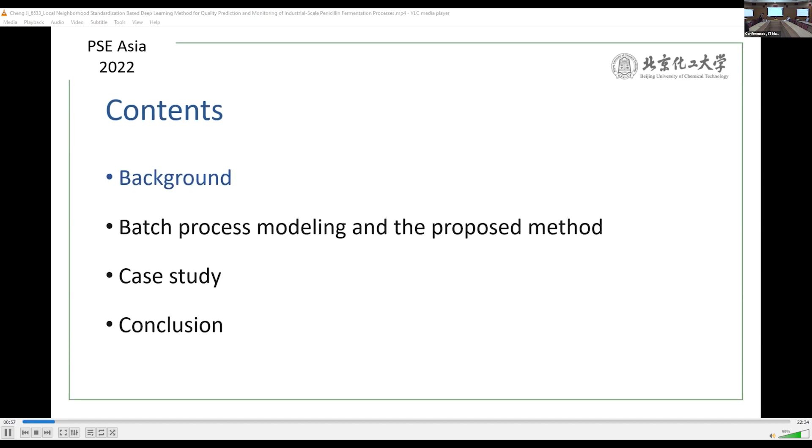The Internet is also known as the International network. It refers to the huge network that is connected between networks. These networks are connected by a set of common protocols to form a single logical huge international network.

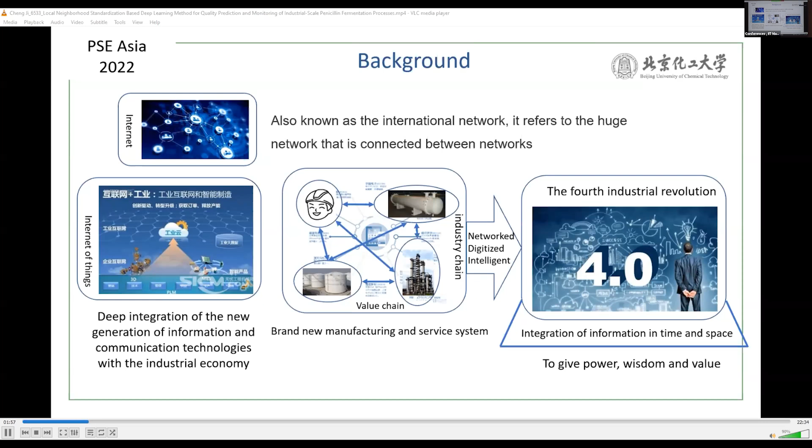The new generation of information and communication technology is deeply integrated with the industrial economy, and a brand new manufacturing and service system is formed, characterized as network, digital, and intelligent. The fourth industrial revolution is an integration of information in time and space to give power, wisdom, and value to smart manufacturing.

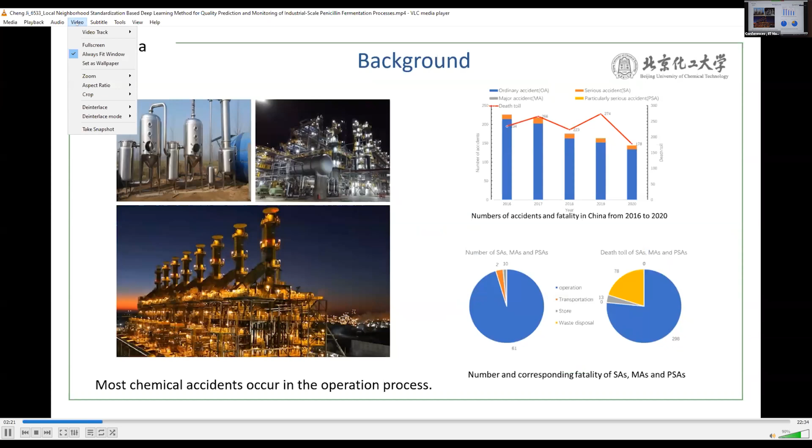According to the statistical data shown in the figure, most chemical accidents occur in the operation process. With the increasing scale and complexity of the chemical industry, real-time monitoring of the operating status of the production process is becoming more and more important, because these faults will not only affect product quality but also pose threats to human life.

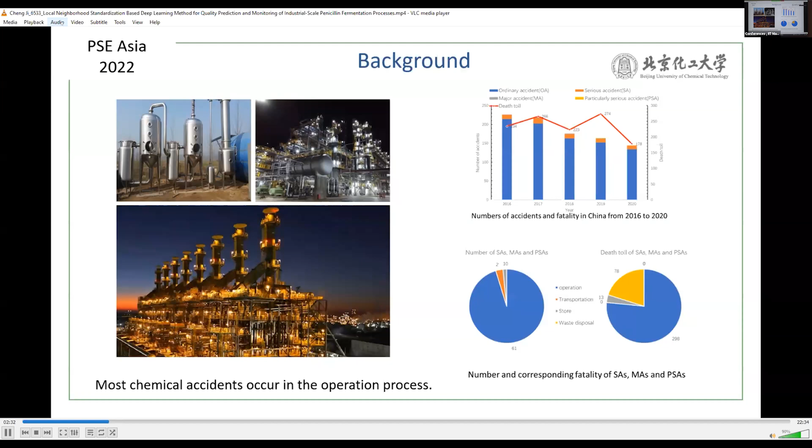In actual production, process monitoring achieved by the operator's observation of a small number of key variables based on a large threshold is still the mainstream way. This does not consider the correlation among process variables, nor can the large amount of historical data be utilized, so it is difficult to obtain promising process monitoring performance.

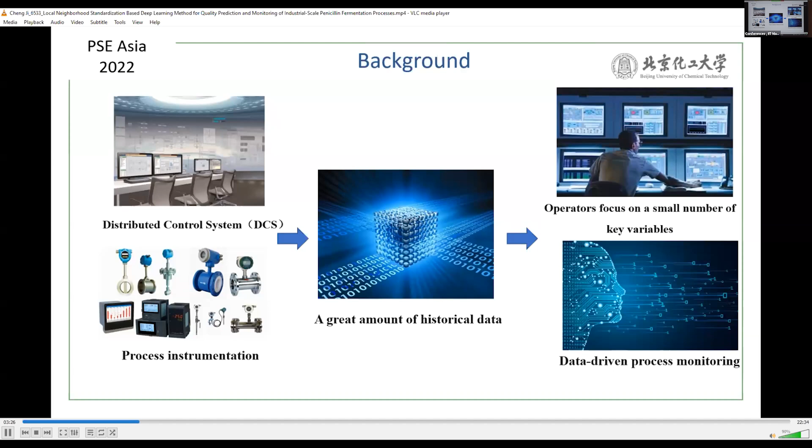To address this issue, data-driven process monitoring methods have been rapidly developed. The procedure of data-driven process monitoring consists of the following four steps: the way of data collection and data pre-processing is rarely fixed, and the monitoring statistic is a measurement of the change or distance in the feature space obtained by feature extraction. So feature extraction is the key step that defines the process monitoring performance.

At the core of developing a process monitoring method, the development of feature extraction methods has been the most intensive and important research topic in the past.

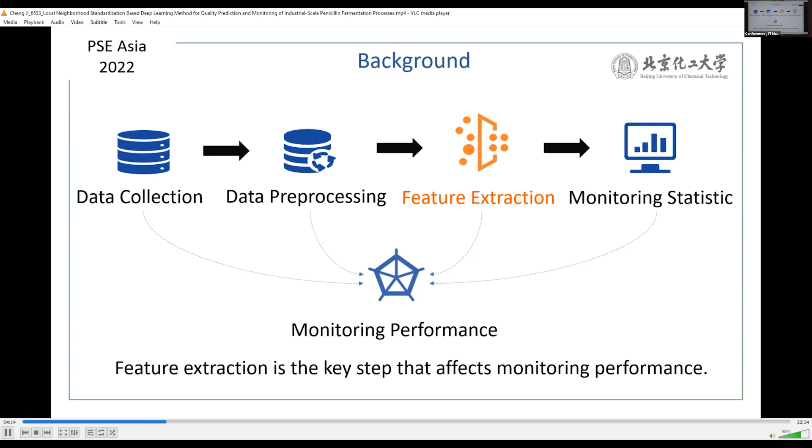Principal component analysis and partial least squares can be regarded as the earliest applications of multivariate process monitoring. The past 30 years witnessed the rapid development of data-driven process monitoring, among which two benchmark processes, one the Tennessee Eastman process and the other PENSIM, have been developed for continuous process monitoring and batch process monitoring.

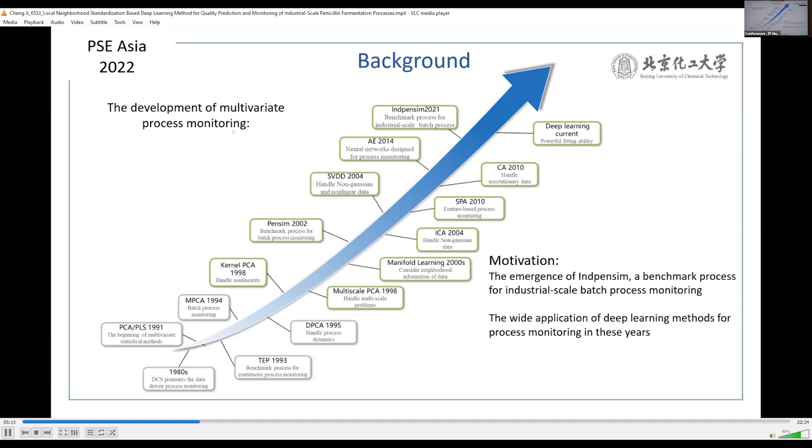This work is motivated by the emergence of IndPenSim, a benchmark process for industrial scale batch process monitoring, and the wide application of deep learning-based process monitoring methods. The original PENSIM concept is easy but with a small scale, so the difference between data with different initial conditions is not significant.

IndPenSim is developed to deal with this issue by extending it to an industrial scale, and a big dataset with 100 batches is provided here.

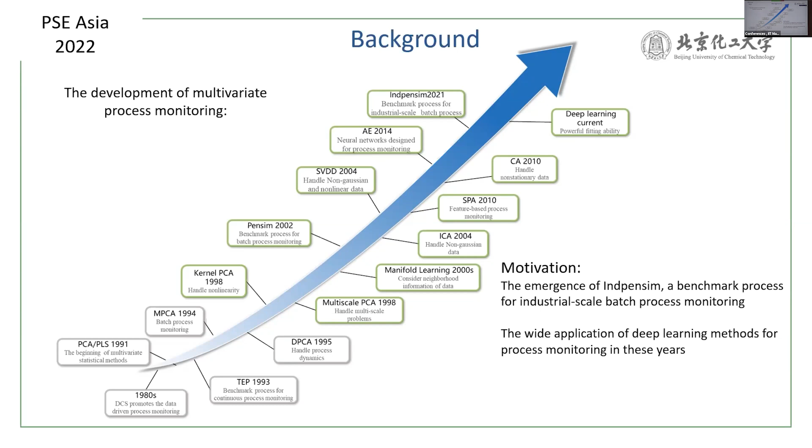This work aims to address three problems in batch process modeling. The first is to avoid difficulties caused by data unfolding preprocessing in traditional methods. This is benefited from the special batch operation of deep learning models, which will be introduced later.

The next is to monitor industrial scale batch processes with different initial conditions. In industrial batch production, the duration and length of a batch can be significantly different among batches, but the internal reaction mechanism should be consistent. Therefore, this could be achieved by extracting the common features of different historical batches.

The last one is the extraction of within-batch non-stationary features of multi-phase batch processes. Traditional recurrent neural networks tend to memorize long-term stationary information, while batch processes are multi-phase processes with short-term non-stationary information. This work proposes a differential recurrent neural network to handle this problem.

Next, I will introduce the proposed method for batch process modeling.

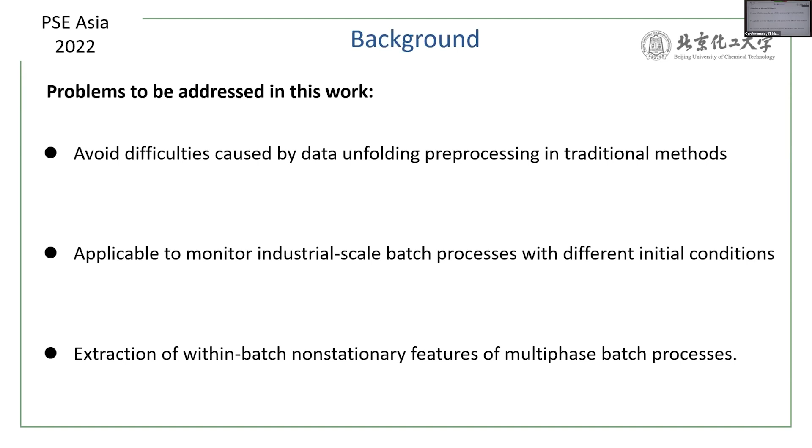As we all know, data unfolding is the most common data preprocessing procedure in batch process modeling because data collected is three-dimensional with an additional dimension of batch. As shown in the figure on the right-hand side, batch-wise and variable-wise are two kinds of ways of data unfolding. However, no matter which kind of way of data unfolding is applied, difficulties will be brought to affect the further feature extraction.

For batch-wise data unfolding, all batches are required to be processed to equal length, which means data supplement must be performed. It will change the internal data information. Moreover, in this way of data unfolding, data of a whole batch should be given to return process monitoring results. It is not applicable to real-time process monitoring.

And for variable-wise data unfolding, the within-batch data features cannot be made fully use of, and the end of the batch is directly connected to the beginning of the next batch, which is not consistent with the true distribution of batch data. Comparatively, deep learning methods can be utilized to handle this issue for their special batch operation.

In this work, a moving window with a fixed length time step is required to input data, as shown in the figure on the right. Once it moves to the end of a batch, it will move from the beginning of the next batch.

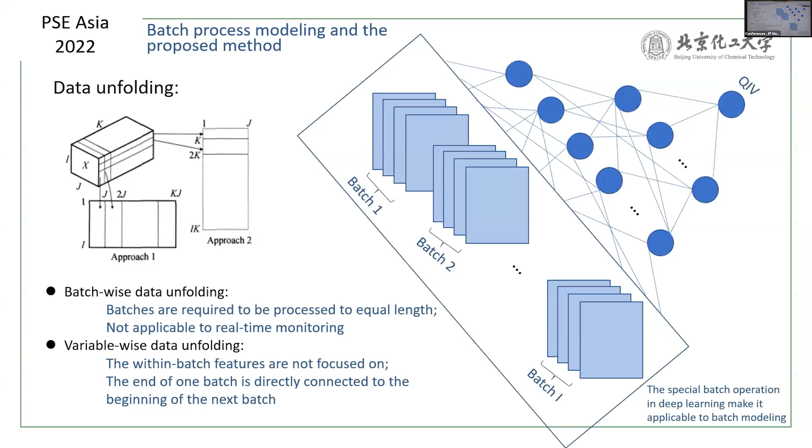Batch processes show the following special characteristics: different initial conditions and length of batch, and within-batch multiphase features. The first one can be handled by the batch operation of the training model mentioned before, but the within-batch multiphase features are mostly not focused on by common deep learning models.

Therefore, a differential recurrent neural network is proposed to handle this issue, in which a differential model is embedded into a long short-term memory neural network to make the memory cell capture more short-term non-stationary information.

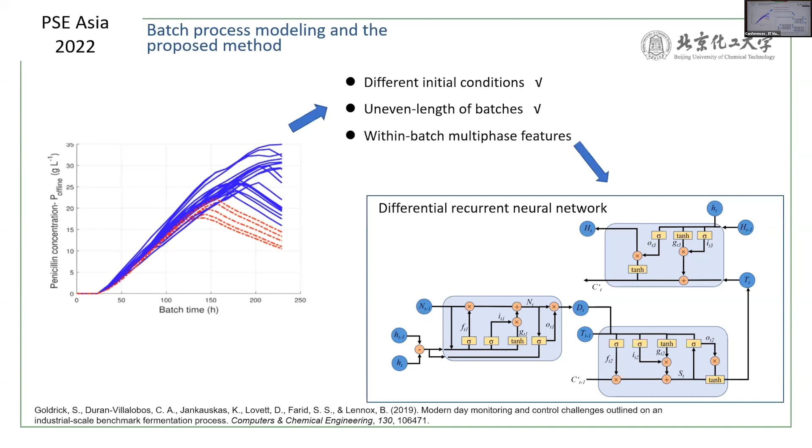Calculation can be described by the following three parts. The first part is used to model the non-stationary information in the hidden state of the first long short-term memory layer, and the next part is employed to define the amount of non-stationary information that should be returned.

The last part is another long short-term memory structure used to get the final output of the proposed differential recurrent neural network model, comprising the hidden features extracted for QIV prediction.

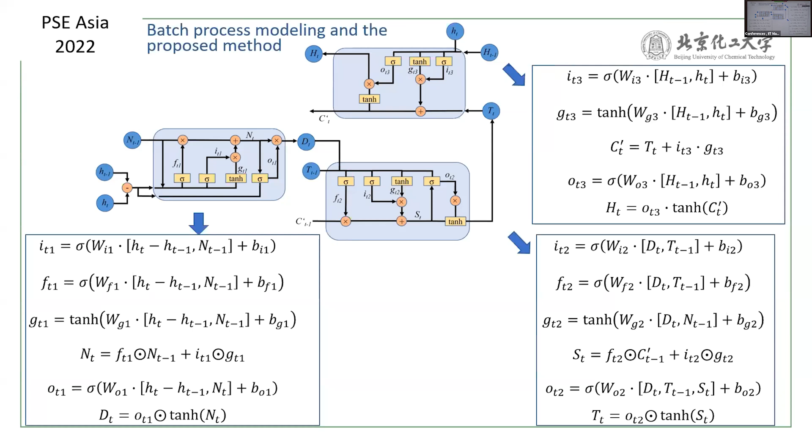The procedure of the proposed quality prediction and monitoring framework can be shown in this figure, as mentioned before. Data unfolding preprocessing in traditional methods can be avoided by batch operation of the deep learning model.

The within-batch model dynamics can be tracked and produced by the differential recurrent model, and faults can be detected by monitoring the prediction residual of the QIV.

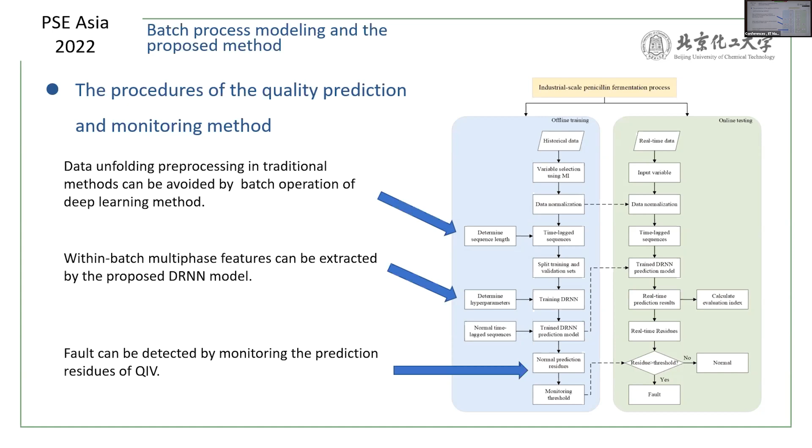In the next section, a case study on an industrial scale penicillin fermentation process will be investigated to verify the proposed method. IndPenSim is an industrial scale penicillin fermentation simulation process developed by Goldrick. Compared to the traditional penicillin benchmark, the penicillin simulation in IndPenSim is extended to an industrial scale and is validated through available real historical data of a real penicillin fermentation process.

The data of the bioreactor used in IndPenSim is shown in this figure. The data can be generated by simulation using MATLAB, and a separate dataset containing 100 batches of simulation is also provided. This dataset can be regarded as the biggest dataset available for data analytics in industrial batch processes. In this case study, the 100 batch dataset is employed.

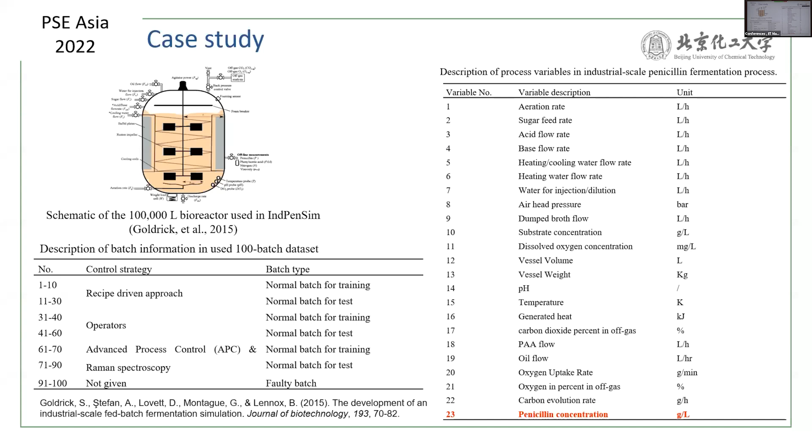Variable selection is first performed in our proposed soft sensor modeling framework. Generally, the variable selection is implemented through selecting the variables that show significant correlation with QIV. Considering that the industrial batch processes are significant nonlinear processes, mutual information is used in this work to calculate correlation between input variables and QIV.

To obtain a threshold for mutual information, a thousand pairs of normally distributed sequences are randomly generated, and the mutual information between each pair of sequences is calculated. The mutual information values should be distributed around a small value because these sequences are independent and the correlation between them is mostly contributed by random factors.

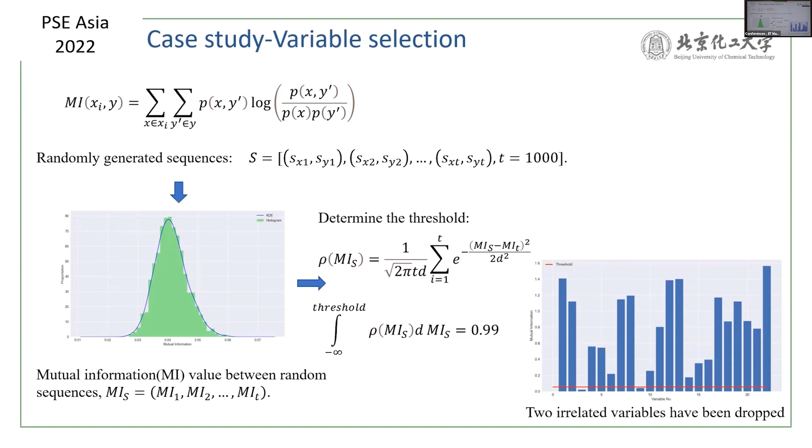The proposed method is compared with partial least squares regression (PLSR), support vector regression (SVR), neural network (ANN), recurrent neural network (RNN), and long-short-term memory neural network (LSTM). Regarding parameter selection, the number of principal components in PLSR is selected as 14. The model parameters C and gamma of SVR are selected as 2 and 0.005.

The structure of all deep learning methods is chosen to be a three-layer network with a maximum of 128 hidden nodes, and the optimizer is Adam. The learning rate is selected at 0.0001 to ensure the model could converge to a satisfactory state. In order to verify that the performance improvement is contributed by the model structure design.

A similar number of parameters are designed for all deep learning models, and the sequence length is determined by grid searching as shown in the figure, because it is a more important parameter to the model performance.

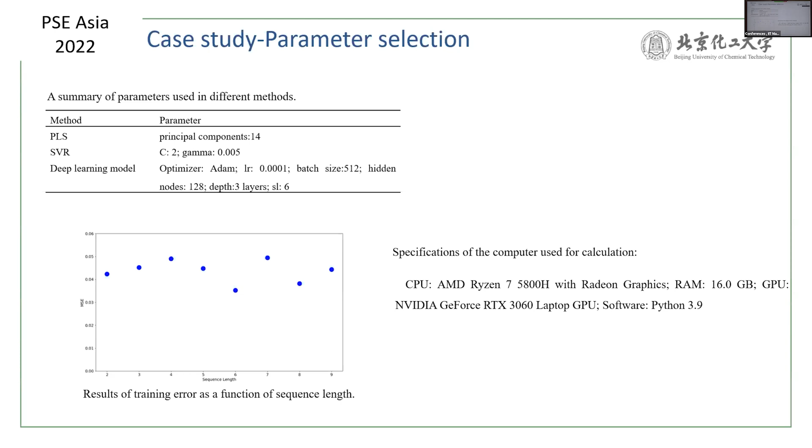Actual value and estimated value of penicillin concentration in test batches are shown in the figure. Solely based on observation of this figure, PLSR doesn't perform very well because it is not suited to handle nonlinear and dynamic features. The prediction error of ANN is also large, which could be due to the poor generalization ability of the model.

SVR performs better than the above two models because of its powerful fitting ability to nonlinear processes. However, the training time of the SVR model is much longer than all other models for large data sets.

RNN performs better because the sequence information has been considered through the transition of hidden space. LSTM further outperforms RNN due to its ability to handle long-term time dependency. As for the proposed DRNN model, prediction accuracy is further improved because the within-batch local information of multi-phase batch processes could be captured by the proposed method.

In order to quantitatively compare the prediction accuracy of this method, all 6 evaluation indicators are calculated for test batches according to the table. The proposed DRNN model shows the best performance on all 6 indicators, which means that not only can high fitting accuracy be obtained, but the distribution of estimated values is the closest to the actual distribution.

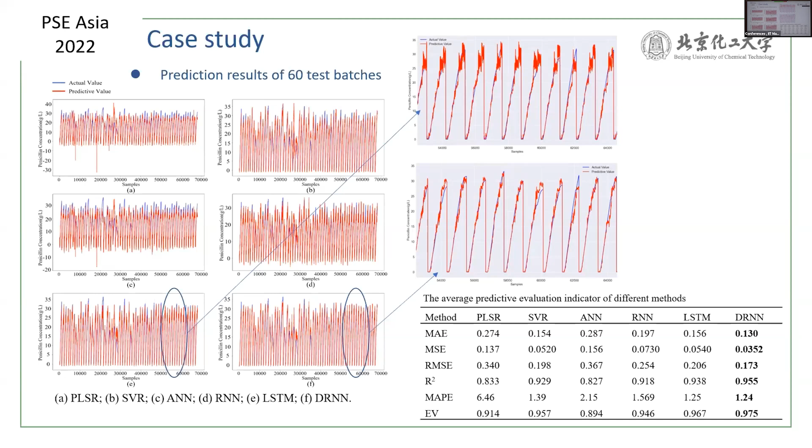As mentioned before, the prediction residues are employed as a statistic for quality monitoring, and a threshold is defined according to the residues calculated using data under normal operating conditions. All 60 test batches are under normal operating conditions, and 2 test batches containing faults are used to verify the performance of quality monitoring. According to the results, the model achieves high prediction accuracy for QIV in normal batches.

The actual false alarm rate can be determined, and a high false alarm rate is mostly caused by the failed batch, in which alarms should be triggered to early terminate the production. Overall, failed batches and faults can be effectively detected by the proposed measure.

For the last part, I would like to make a conclusion.

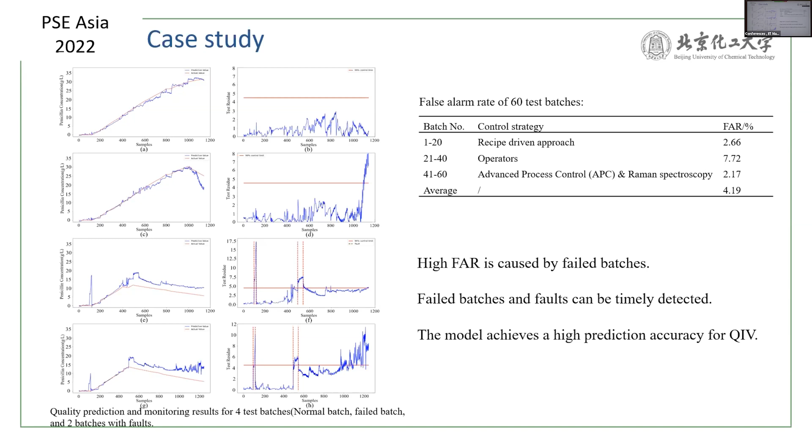A quality-related industrial scale batch process monitoring method based on soft sensor development is presented. The use of deep models avoids the limitation caused by batch processing, and embedding differential operation into long-short-term memory network can improve soft sensor prediction performance.

The method is verified by an industrial scale penicillin fermentation simulation process. Results observed by the proposed framework demonstrate its potential industrial application prospects for multi-phase batch process operations. Future research associated with batch process control can be conducted based on the proposed framework.